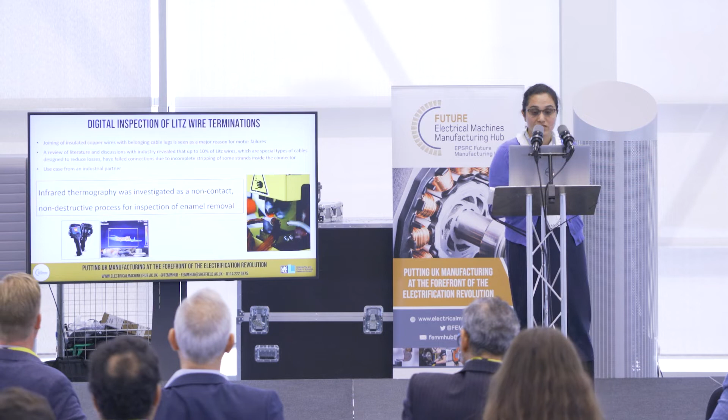So the first activity that I'm going to discuss is digital inspection for litz wire terminations. As you may know, for litz wire terminations, the process of making terminations comprises two activities. First one is enamel removal, and second one is actually making the connection. Joining of insulated copper wires with cable lugs is seen in literature as a major reason for motor failures. A review of literature and discussions also revealed that up to 10% of litz wires, which are special types of cables designed to reduce losses, have failed connections due to incomplete stripping of some strands inside the connector.

So we obtained this use case from an industrial partner who were very kind to give us the use case. And that led to us investigating infrared thermography as a non-contact, non-destructive process for inspection of enamel removal.

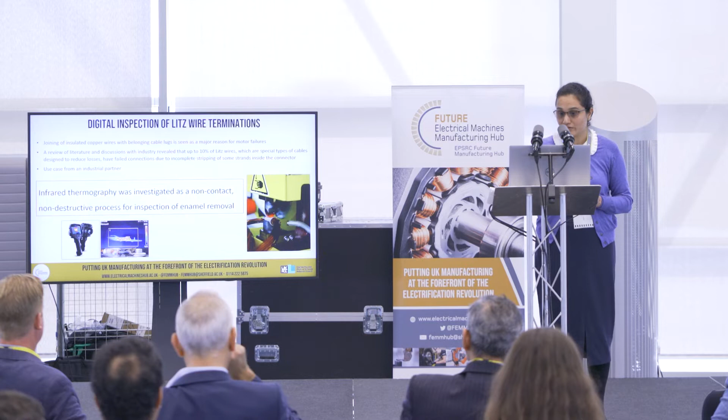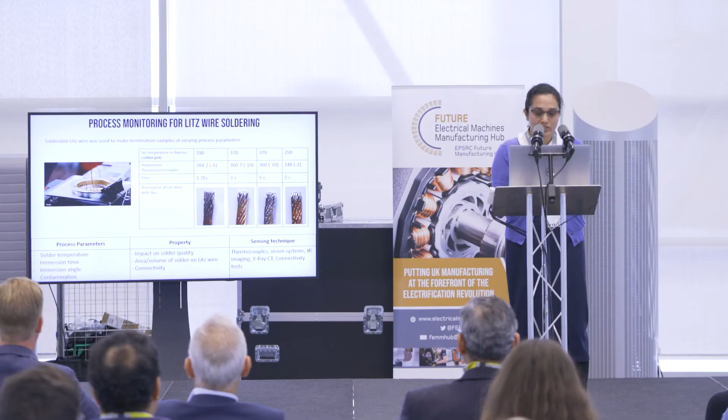electrical machines. So what happened was we took our sensing equipment, thermocouples, vision systems, etc., when the termination was being built. And what was found was that between the temperature the solder pot was reading and the thermocouple we put in, there was a huge difference in the two readings, up to 10 degrees in some cases.

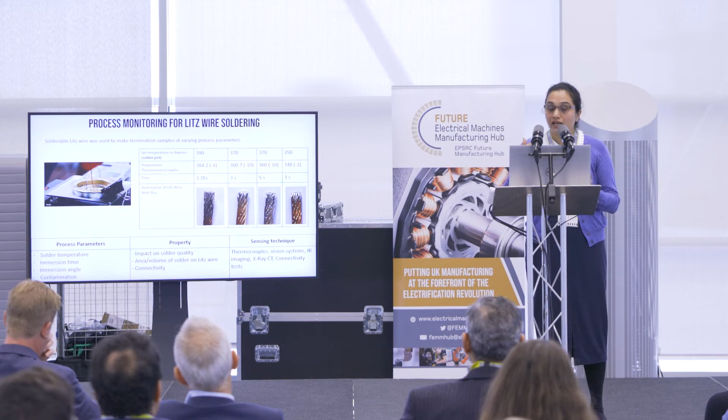And it was found that just a couple of degrees, or up to 5 degrees, of temperature in the solder and half a second difference in dipping time can lead to a massive difference in solder quality. Later on, we looked at other process parameters and sensing techniques. The first one, soldering, I have already discussed. Then we did the visual inspection of the joint using RGB techniques. Can we calculate the area and volume of solder on a particular joint?

So the rows highlighted in green are the activities that are more or less complete. And now I'm looking at the other rows in yellow. I'm going to focus today on the X-ray CT and infrared imaging of the joint. So why X-ray CT? When a joint is being made, it is capped inside the lug. Can we check the porosity and the solder fill, and compare them with process parameters to determine the joint quality? And then I'm going to talk about how we are using infrared imaging techniques when high current is passed to check the quality of the joint.

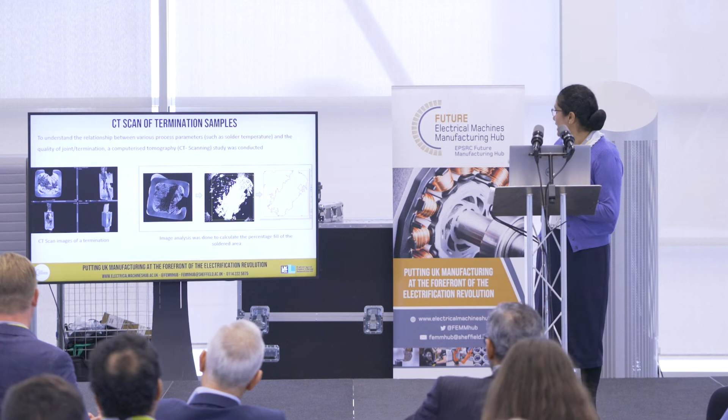So, CT scan of termination samples. We kindly received some termination samples from industry. And to understand the relationship between process parameters such as solder quality, temperature of the solder, contamination, etc., and the quality of the joint, we performed a CT scan of the termination. After the CT scan, I conducted image analysis to calculate the percentage of porosity and percentage of solder fill in the soldered area. This was very important, as porosity is bad for connectivity and heat dissipation.

This CT scan study also allowed, if I can, so there's a video. Okay, so I had actually prepared a video that showed the three-dimensional view of the joint from end to end, but for some reason it's not playing. How do I play it? No problem. I'll move to the next slide.

Right. The other study that I'm going to talk about is quality assessment for terminations using a combination of RGB and infrared imaging. Following the study that I've already discussed, that led to the start of a new PhD in this area. So my student Alex is looking at quality assessment for terminations using a combination of RGB and infrared imaging.

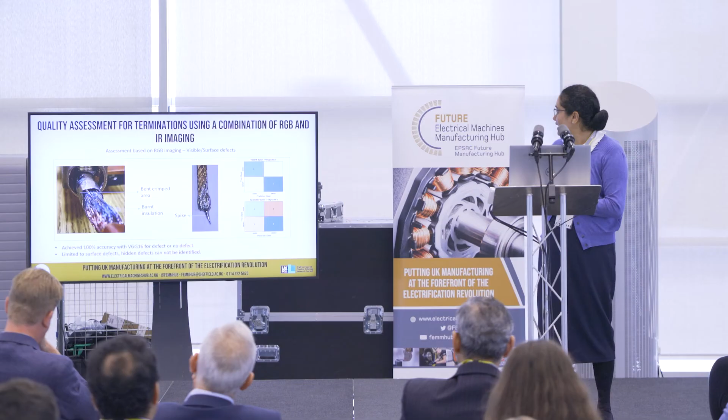We used the VGG16 algorithm and trained it to look at the surface features. For example, in this case, if there was a spike or no spike, if the sample was good or bad. And we achieved 100% accuracy with VGG16 for defect or no defect on the defects that are visible, that can actually be seen using our RGB camera.

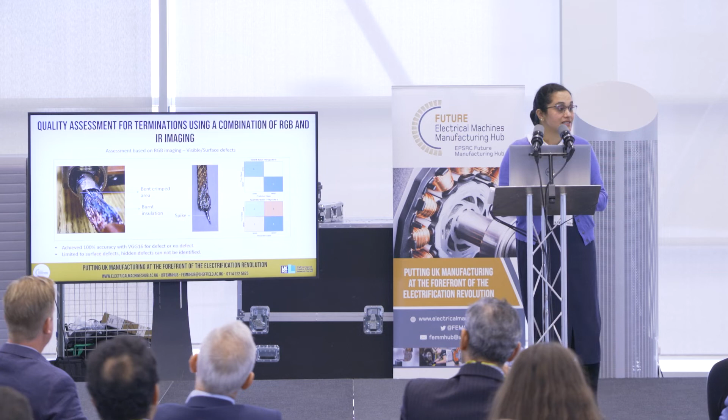The other classes that we are going to add are if the crimp is bent, and the area of burnt insulation: is it more or less than what it should have been? Okay, so I talked about visible defects. Now, what about the defects that are underneath the surface, that are not visible? Can we catch them?

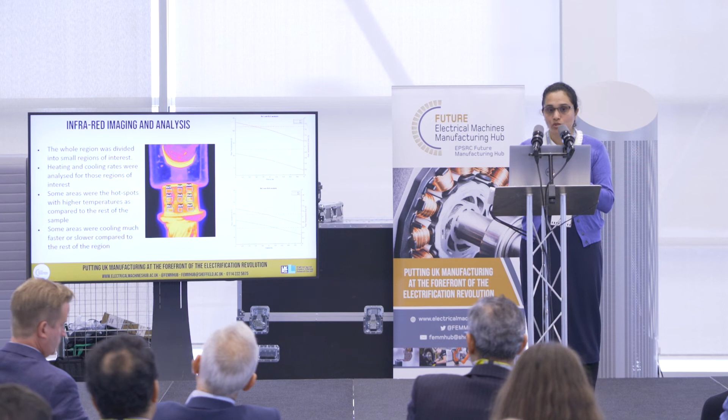So, in order to catch the invisible defects, we have started using infrared imaging and analysis to catch the unseen defects. So a very high current was passed through a termination sample that we obtained from industry. And this high current was passed through a test rig that Steve kindly allowed us to use, which he has developed for his work.

When high current was passed through this termination sample, we divided the whole region into small regions of interest, and the heating and cooling rate of those regions of interest was studied. It was found that some areas were much hotter than other areas. Some areas were cooling at a much faster or slower rate compared to other regions. Okay, so that's fine. We don't know what's underneath.

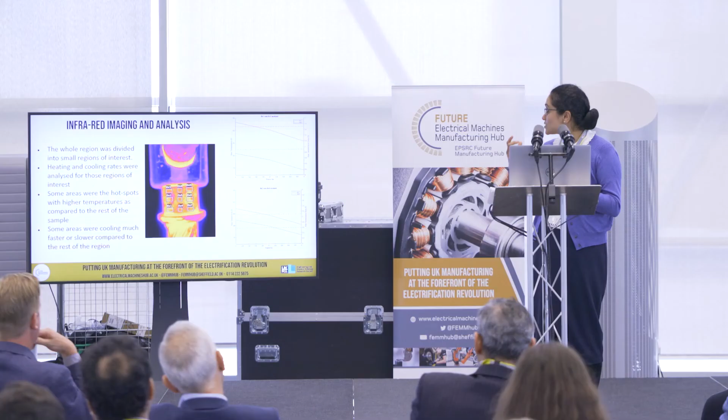How do we understand what is happening there? Then we had the CT scan images. So the next step was to compare these infrared images with the CT scan images that we obtained earlier. Can we locate the air gaps by analyzing the rate of heating, cooling, or the temperatures that we have seen? It looks like we can, although these are very initial studies, but we can.

So what we have so far found is that the regions where there was significant air gap, those were the regions that were the hottest in the whole of the sample, and they were actually cooling at a much faster rate compared to the rest of the region. Although these are very initial results, and Alex needs to do more experiments to compare more samples, this is what we have got so far.

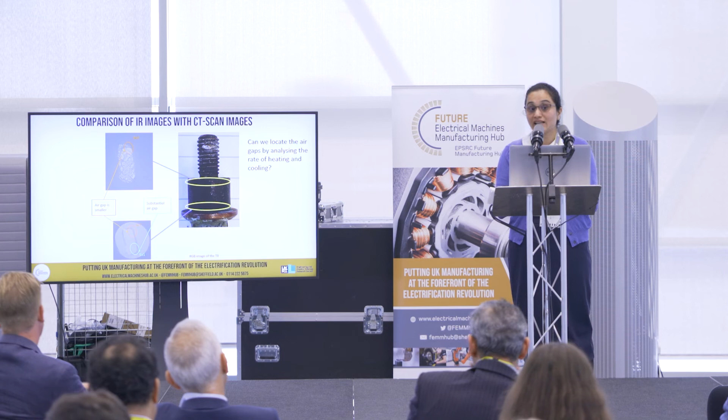And it looks like, by comparing the thermal imaging, infrared images and CT scan, it may be possible that we can look at the hidden defects using thermal imaging.

Finally, I'm going to talk about a case study that was conducted by Dr. Michael Farnsworth. This work was developed as part of a short proposal that was written by Dr. Michael Farnsworth with TWI. Here, the main aim was to capture the process parameters, which is the tip of the welding and the speed and the defects, and if those process parameters or the result could be fed back to the operator to change or make settings in real time.

3 error classes were the focus of this work, which are excessive sidewall fusion, lack of sidewall fusion, and splatter. And in this work, there was a comparison made with traditional machine vision tools versus deep neural networks in detecting the tip and if a defect could be identified.

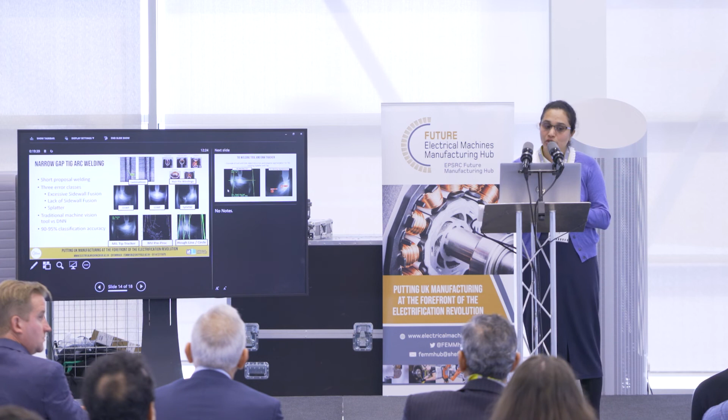So the bottom figure shows the 3 techniques that were used to detect the tip of the arc. The first one is MIL tip tracker. The second one uses Canny edge detection to detect the tip. And the third one uses a circle algorithm. With the use of deep neural networks, 90 to 95% classification accuracy was obtained in identifying the tip and classifying the right error.

The right-hand side figure shows the TIG welding segmentation using deep neural network, where we have stated that 90 to 95% accuracy was obtained in detecting and classifying the right error.

And finally, I'm just briefly going to touch on some of the future work that we are planning to do. As I've already discussed the various techniques to make terminations, finally, just a bit of update on the thermocrimping or the hot crimping technique. Thermocrimping combines high process stability with short takt time. So it is a technique that is of huge interest to industry and academia.